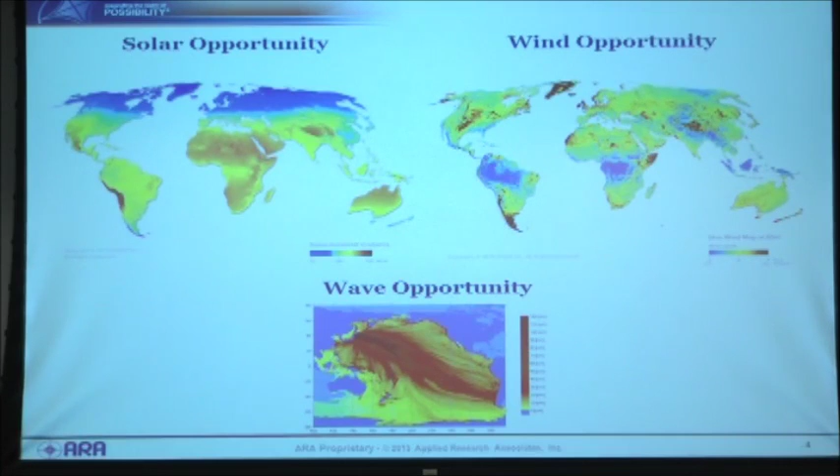If we compare Germany and the USA, in population the United States is almost 4 times Germany, and in land area almost 28 times. Germany is almost as big as Montana, actually smaller than Montana. In GDP, the United States is almost 5 times the German GDP.

If we look at the solar energy incident on the United States, it ranges between 1,200 and 2,500 kilowatt-hours per meter squared per year. In Germany, it's between 1,000 and 1,400. Now, if Germany has the guts to declare the Energy Plus plan as the national goal of the country, then I think we need to have the guts to declare at least the net zero plan as our national goal in this country.

In ARA, in our Smart Energy Group — SMART stands for the usual renewable and sustainable technologies — we work on developing a few efficient technologies, both energy consumer and energy production technologies. I'm going to give just a few of them for the sake of time.

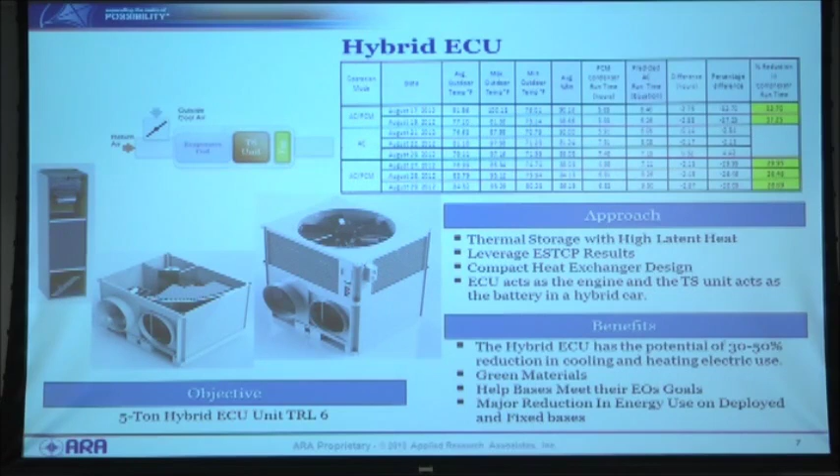Thermal storage in buildings, this is to increase the building walls' thermal inertia. It's like old days when the ancient Egyptians built their homes and worship buildings with thick walls to maintain the temperature steady inside the building. So we can do that with phase change material if we integrate that in the building walls.

There are two products available. They are not commercial yet, but you can buy them from the companies. One is the ThermalCORE, which is a sheetrock impregnated with a microencapsulated PCM. The other product is the ThermaMATS, which is installed behind the sheetrock. It's a mat with pouches filled with the PCM.

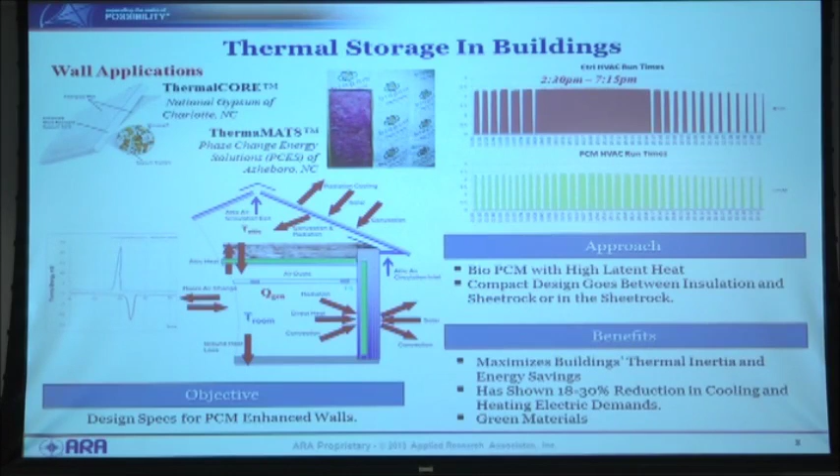We tested the same material on what we call the doghouse test. We have two small buildings that look like a doghouse. One of them is again equipped with the PCM and the other without. The PCM unit was on the walls, as you can see in the picture, and under the roof of that doghouse. And you can see on the graph the daily readings.

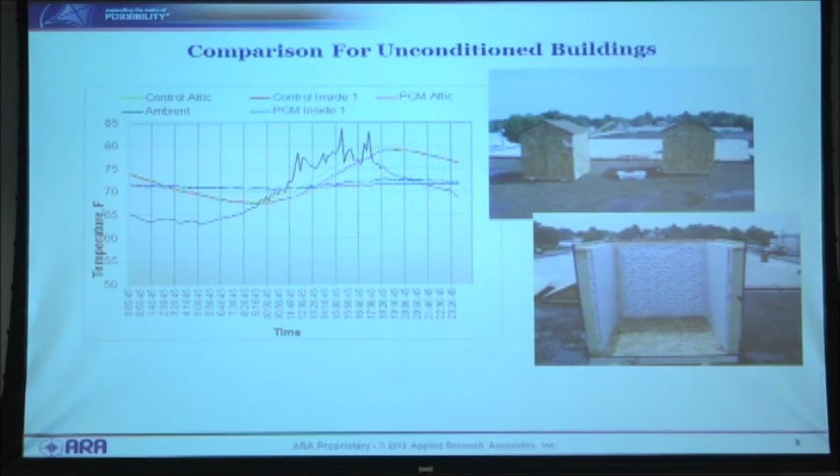That day was apparently a little cloudy, and the outside temperature reached almost 85 degrees. The unit without the PCM, the attic temperature and the interior temperature just followed the same behavior, while the one with the PCM stayed almost steady over the 24 hour period. It ranges between 71.5 and 73 degrees inside that doghouse.

Of course, the PCM product potentials are huge. You can see them used in pizza boxes—when you have delivery of pizza, that box has PCM in it, so it can keep the temperature at the right level to reach you hot. It can be applied or used in tiles and floor covers, in furniture, and the wall, as I mentioned, in paint, and in mechanical applications like heat exchangers.

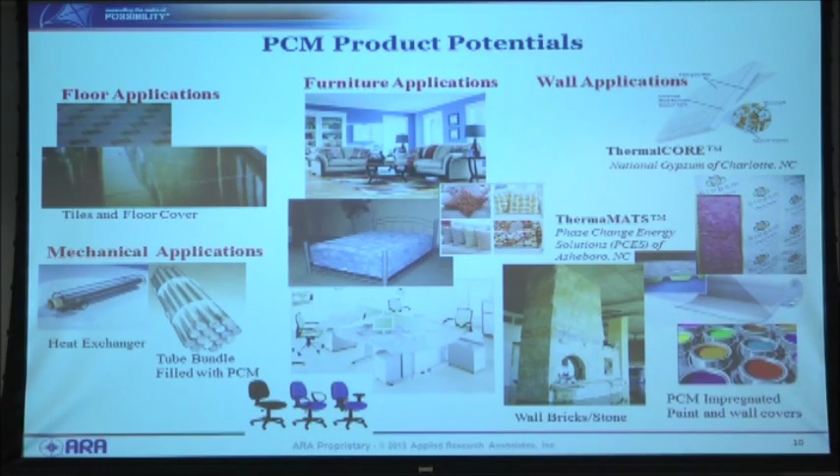We have another project which is a multi-fuel electric generator. We developed a fuel processor that can take any kind of gaseous or liquid fuel and convert it to hydrogen-rich syngas, and then the syngas can be fed into a fuel cell to power it and produce clean energy.

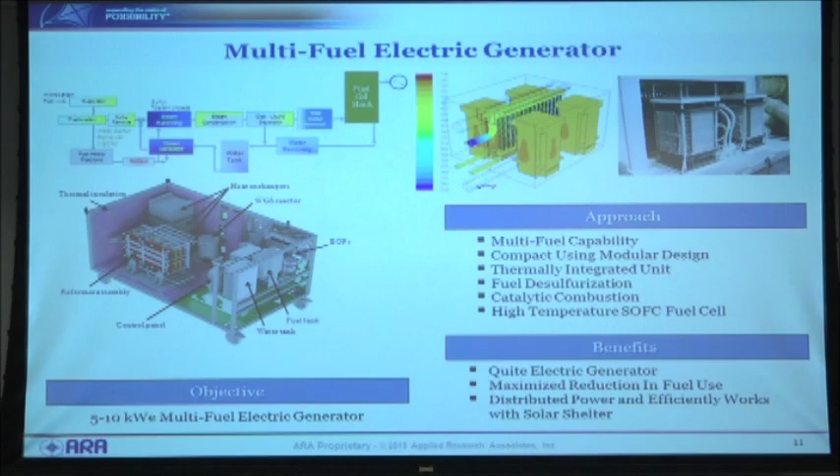One of the projects we finished very successfully—I hope you guys saw that on TV yesterday in the news about AFCEC—we displayed the efficient shelter technology. We were able to take a shelter, and you know, in deployed bases, each shelter has a 5-ton air conditioning unit, and this 5-ton unit runs 24/7 just to meet the cooling demands on the shelter.

So we took the shelter, we put a fly on it, and on the fly we put photovoltaics, a thin-film photovoltaic system, and we used a better liner in the shelter and a better door on it. We were able to cool and heat 2 shelters with 1 heat pump. That's a huge reduction in fuel consumption on deployed base.

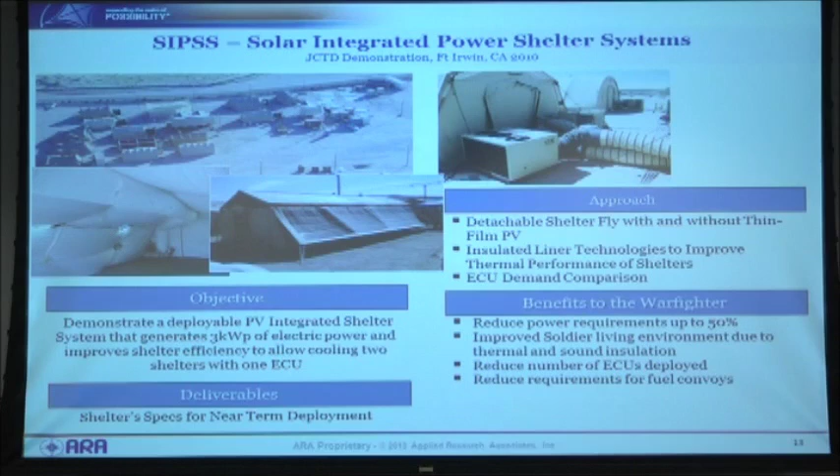If we calculate the reduction with the photovoltaics generation, we reduce the fuel consumption by 46, almost 47%. And if you know that 70% of the power generated on the base is consumed in air conditioning, this translates to a 33% reduction in fuel use on the base.

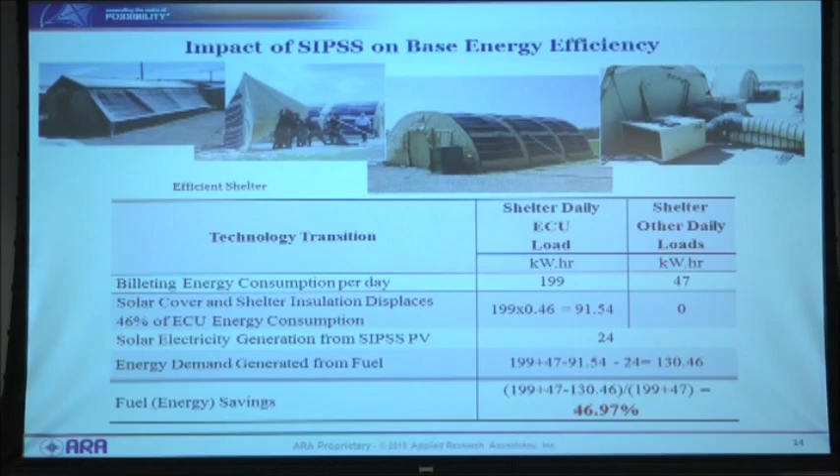Our next step is to model the shelter thermally and really design each layer to give maximum thermal resistance to the heating and cooling load.

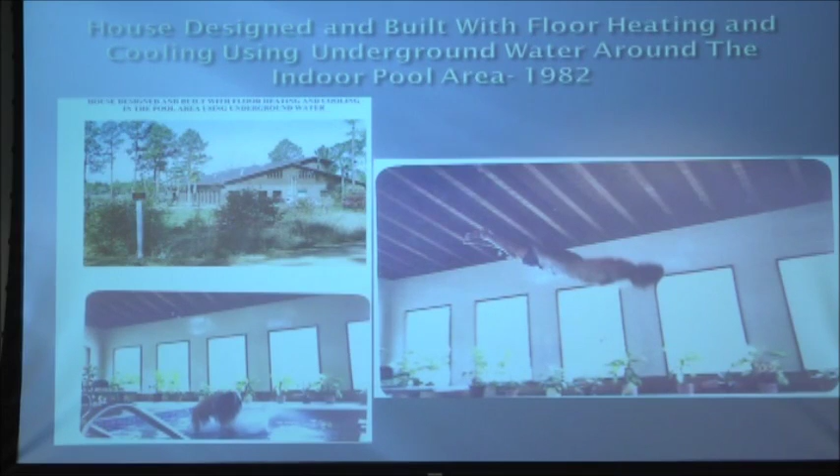This is the house I built, I designed actually, and this is me also jumping inside the house. This is an indoor swimming pool in the house, 60 feet, approximately 7,000 square feet added to the existing house. This house exists in West Bay. If you drive 388 west, south, Pearl Creek, this is the only big house you can see. I don't know who's the owner, and I don't think the owner knows what he has here.

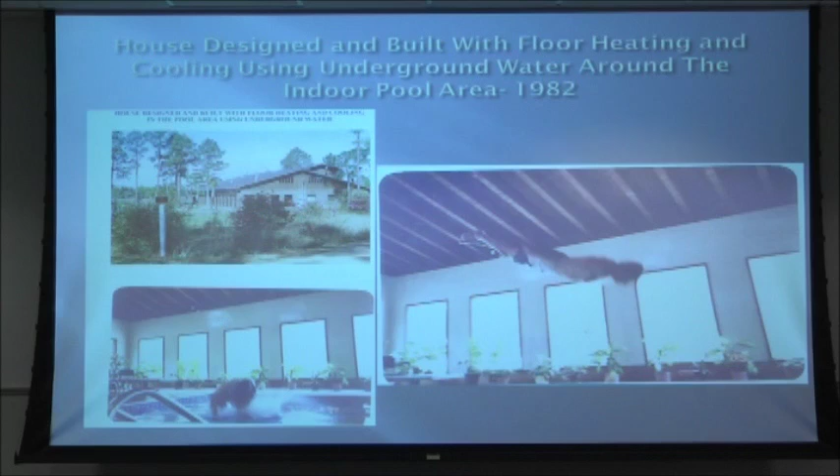Next slide, this shows you the roof is facing south, that it was prepared to put solar collector, passive solar gain. All these windows are for passive solar gain. The next slide, I'll show you.

This, of course, at that time there was no AutoCAD. If you look at all this piping around the swimming pool area, I put insulation above the grade and put copper pipe, 3/4 copper pipe, header, and I planned on putting coaxial pipe, getting underground water at 55 degrees and distributing this in the area of the pool for preheating, pre-cooling only, and avoiding the condensation or the dew point. All of this has to be done.

Of course, I got in trouble doing that. This is state of the art nowadays, using floor heating, floor cooling. At that time, if anyone here was around that long, there was no Lowe's or Home Depot, only the warehouse and the Ace in Glen Burnie.

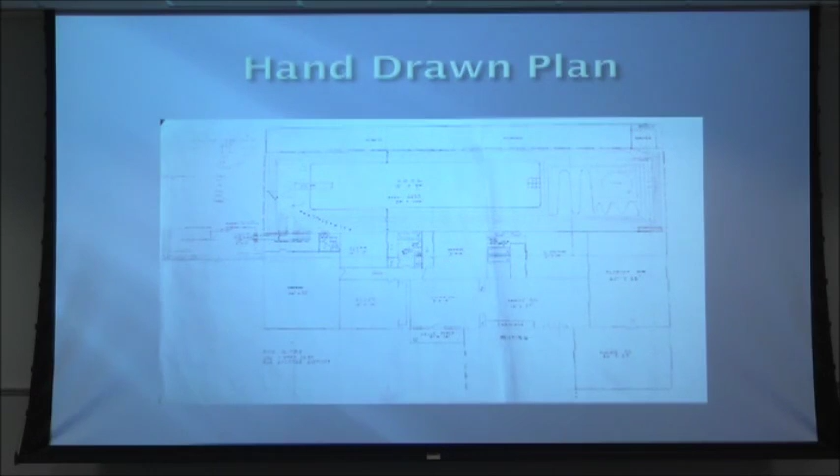Next slide. Now, as you have seen, I have a background in nuclear engineering, background in energy, solar energy, everything to deal with engineering related to energy. And also I took like 15 different courses in mechanical engineering, electrical engineering, you name it.

In my opinion, you can sail against the wind. You can actually pull with the sun, but you cannot go against the wave. With this wave, this is what I mean, that's your wave and my wave. Solar energy was not something you could sell at that time.

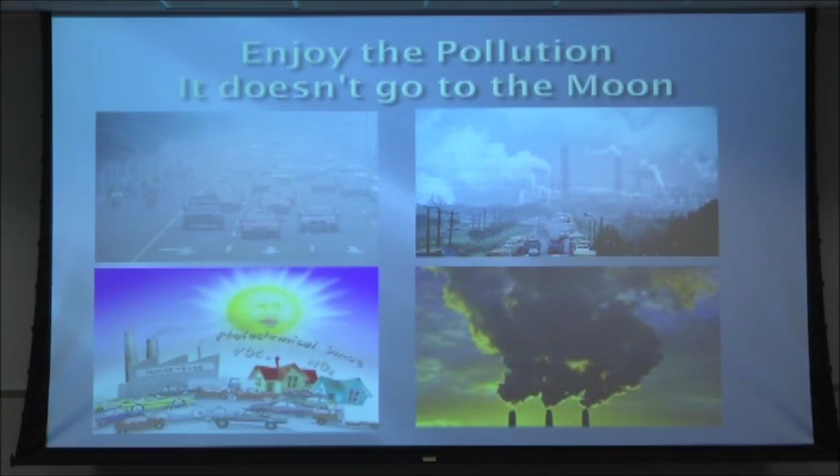I wish a young engineer could calculate this. The universe is limited. You can calculate how many atoms there are and how long this will last. It's a simple calculation in my opinion. But by all means, what you're putting into the air here, is it going to go to the moon? No. It's going to stay here in the atmosphere. We are in a big garage, whether you want it or not, a big garage that we cannot afford to fill up producing this air.

Thank you, Dr. Rafa. And as a non-engineering person, I can tell you I still do not know the difference between power and energy. But as a finance person, I understand about dollars and currency. With 2 kids in college, I do not have enough of it, and what I do have, they take all the time.

One thing here, in the United States, every person uses 12,000 watts per person per year. In Europe, they use 6,000 watts. When you multiply watt, which is power, by time, you get kilowatt hour, which is energy. This is what you pay for electricity. In underdeveloped countries, they use only 200 watts per person, which is basically like 2 light bulbs per person per year. So your contribution to pollution is 200 compared to 12,000.

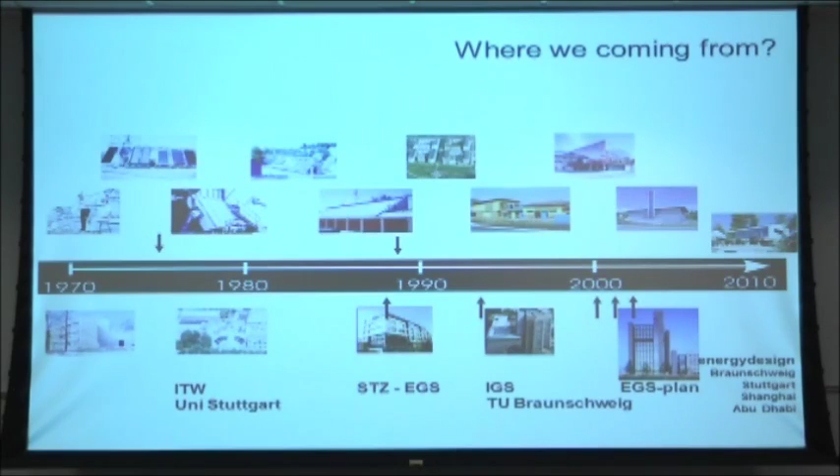And during all this time, 40 years now, we established a lot of companies around me. So at the moment we are nearly 70 to 80 engineers around Germany, Shanghai, and in Abu Dhabi. And at the institute we are 30 scientists.

So the reason I'm here, by the way, is that we created an EGS-plan here in the United States, in Panama City. So together with my very old friend, we would like to introduce solar systems into practice.

And the reason is, I think the time is now there, because we had a revolution, and the revolution was that the Chinese are now producing photovoltaic systems 10 times — not 10%, 10 times — less expensive than it was maybe 5 years ago. When you asked me 5 years ago if photovoltaic had a chance compared to solar thermal for making hot water, I would never say, oh yes, it had a chance. They had no chance, because photovoltaic was so expensive in the past. And then came this revolution in China. The Germans and other countries developed the machines, the production there, and now they re-import, and all the German companies are bankrupt, by the way, at the moment in the solar energy field.

But this was happening for the customer. For the customer, what's happening now? I'll give you the message: at the moment, if you put one piece of photovoltaic on your roof, it's cheaper than the electricity you buy from the grid. Maybe you don't believe me now, but we can go into detail if you'd like to know the real prices, because this is what we have done in the past, in the last, let's say, 10 years in Germany. So let's go very quickly to this.

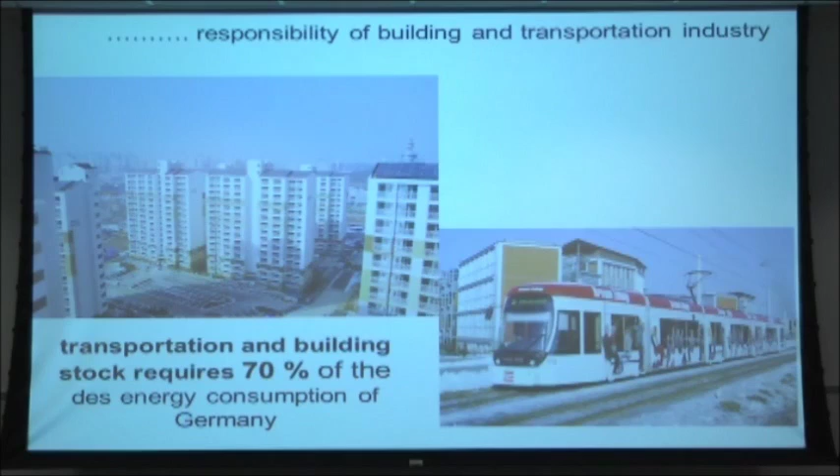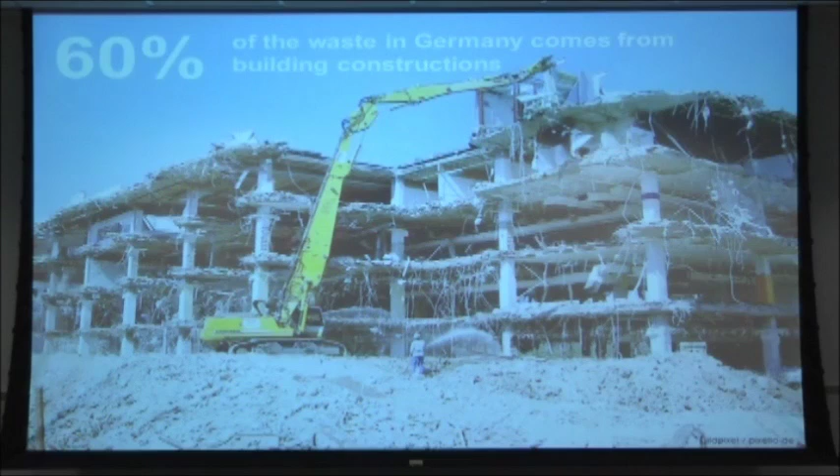So this is our challenge. Another challenge is that 50% of worldwide material consumption is construction, and 60% of waste materials is also linked to construction. Mr. Arafat told us he built nice houses without garbage, without waste, but the reality is 60% of all the waste we're producing comes from building construction. So we have to think about this.

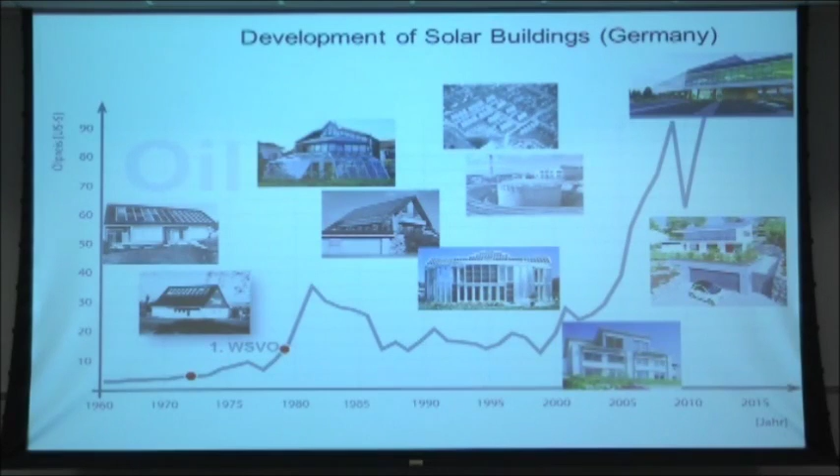We have a grid, we have to feed into the grid, so in recent years we've been thinking more about smart grid technologies - all things are linked, the cars linked with the buildings and so on. So this is what I would like to speak about.

I think I've spoken a lot about this. So this is the National Plan of Germany. What is it? The National Plan was from 2010 - our Chancellor, Frau Merkel, introduced it, called the National Energy Plan.

It was the first energy plan we had, and it was a plan with real values, clear objectives - not just blah blah blah, we could do this, maybe we could do solar, maybe we should have wind, blah blah blah. No, a clear objective was set. I will show you the figures.

I hope I translated this right: Energiewende. If you go by car in one direction and make a U-turn, you go in the other direction. This is the word in German - Energie means energy, Wende means you make a U-turn. So this energy U-turn came in 2011, after the plan.

In this energy U-turn, one thing you may have heard is that Germany switched off all nuclear power plants. We had nearly 20, we switched off 8, and nothing has happened. A little bit more gas generation plants are growing up, but by 2022 we will have all nuclear power plants off.

There's enough time, and from an engineering point of view, I think there will be no problem - this will be solved in the next 6 to 8 years. But what we need, of course, is a cultural change. If we don't take the people with us, we could not reach this Energiewende, this energy turnaround. We need the people, and the people have to follow these political decisions.

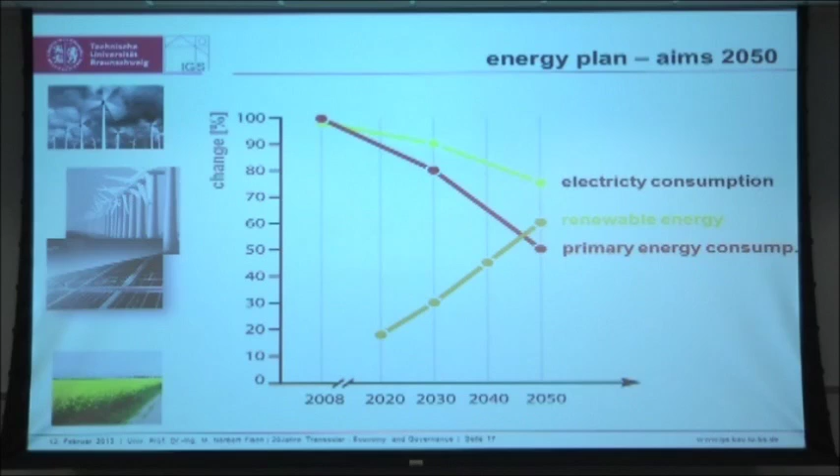But the economy point here, for the economists, GDP - when I was in school, university, I learned that GDP is parallel to energy consumption. This is what we learned. Your gross domestic product is parallel to the energy you use or consume. Maybe this was right before 1990, but from 1990 to the newer days, you see the gross domestic product rising up, but our primary energy consumption is stable. It's not increasing, not decreasing, but our economy is increasing as typically people expect. Is this okay? Question mark for our people.

But now what we've decided in Germany is that we would like to increase the GDP by 26% by 2020, but the primary energy should go down over 20%. I call this - my expression - hyper decoupling between economy and energy consumption. So we will see if this is working, we will see.

So, smart buildings and smart grids - I wrote a book about this in one month. This book will be published in English also. This book describes smart cities, smart buildings. My friend helped me translate it - it was hard work for him the last months to translate this book from German. It's a German book, in English.

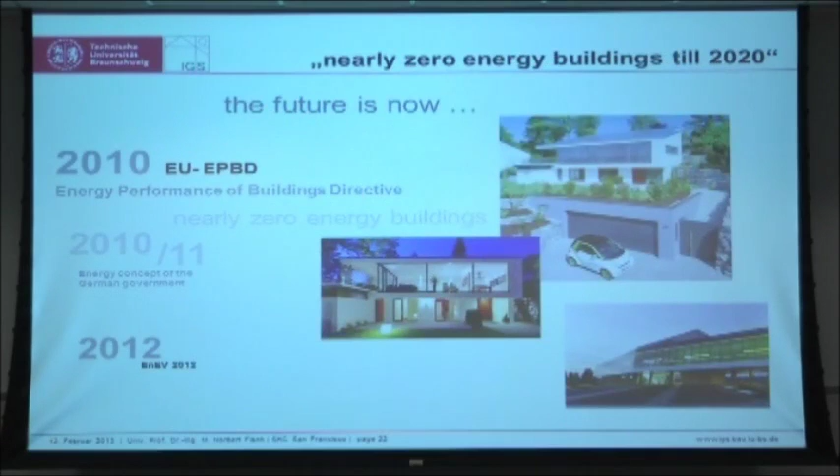You will see that the car, the buildings, and the decentralized system is one unit. So they communicate with each other. When we're speaking about smart grid, what we mean is that we have an intelligent network, and we combine with this intelligent system energy producing and energy consuming. It's a kind of communication system, and this is what we're working on. I would like to show you some of this project.

What means net surplus energy? There are two explanations. One is that over the year, the balance of what the building is producing is higher than what the building needs for everything, by the way - not only for cooling, but your fridge, your washing machine, your dryer is included in the balance, and this is what you consume. It means the way from energy consuming buildings to generating buildings. Another, more advanced explanation is that during the lifetime of a building, the building would export more energy than it required to be built.

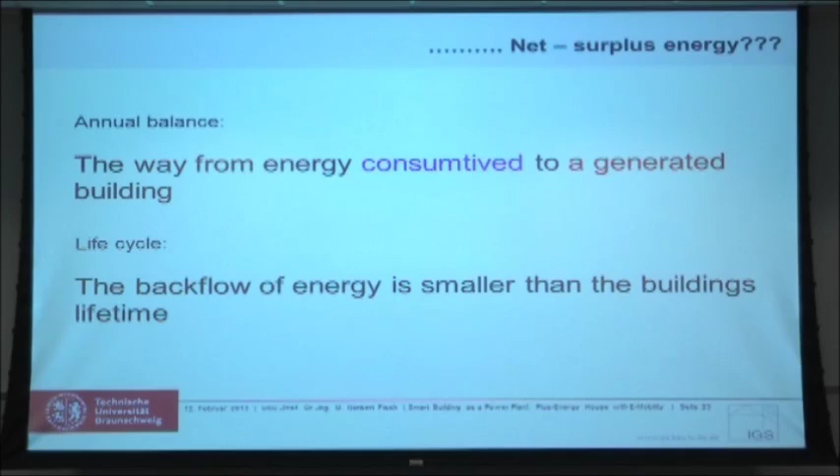Everyone who builds a building needs a lot of energy because you have to buy your glass, your wood, your furniture, you have to buy everything. In our case, we use a lot of concrete - our houses have a lot of concrete. They don't shake when the wind comes, they're very stable. So there is a lot of energy in the concrete and a lot of energy in the glazing, because we work with nearly double or triple glazing. When this happens, this is the graph you see - this is what you might call gray energy or embedded energy, the energy contained in the material that you have to produce.

During time, if this is an export building, a surplus energy building, you have a certain energy payback time, just as we have a money payback time in the economy. When I speak about PV, it's less than 10 years, by the way. The energy payback time of this house - I'll explain more about this house - is nearly 22, 23 years, and this is marvelous. No other building will give something back. This building has only cost a lot of energy but gives nothing back - and of course, that's normal.

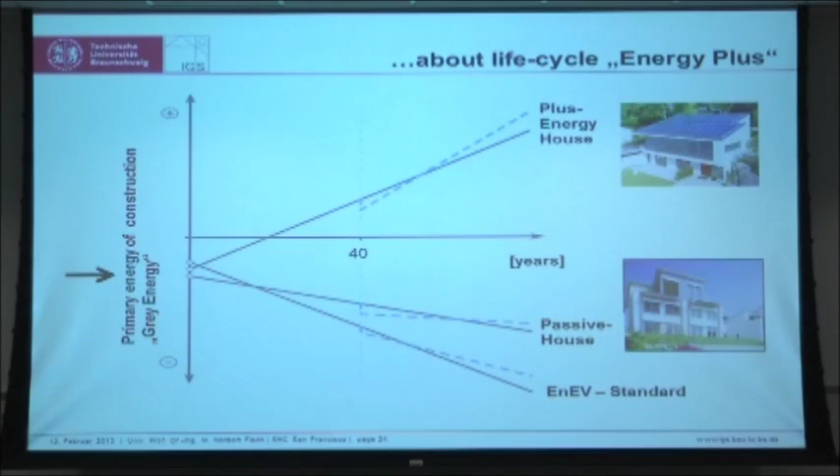But this, let's say, was the revolution of PV - producing electricity from solar. From an engineering point of view, I can tell you, you can sleep well - you have no problem with steam, no corrosion, no explosion, because sometimes with water systems the store gets too hot and corrodes, but with PV the pump isn't running by electricity in that way, nothing happens. Today, the electricity - what was today? It was totally cloudy, shit weather, it was raining. When you come to Mr. Arafat's house, still with rain we have electricity output from the PV. You could not believe it, but we have so much energy that you can totally light your house, even by this weather today when it was raining.

This is typically PV, and this is the reason it has come down so much in cost economically. Solar thermal in the last 20 years has only seen a factor of 2 reduction in cost. Photovoltaic has come down a factor of 8, nowadays a factor of 10, because the price keeps dropping - every month we get new prices from the modules themselves.

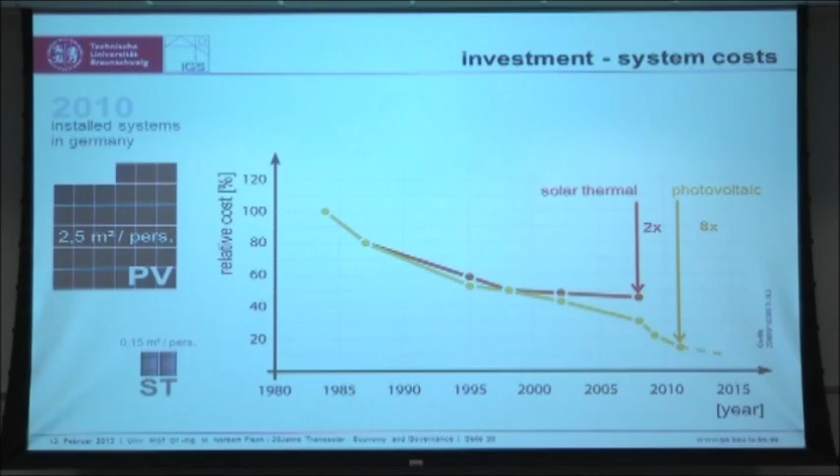I would like to show you, because I delayed a little bit, some commercial buildings we have built using this concept. When we're doing a concept, by the way, Mr. Arafat told you that first you have to look at the location, and also when we build commercial buildings we look at the location - what is happening there? Is there groundwater? Is there wind? How does the sun come through the building? We call this an energy concept process based on location.

This is, by the way, the European Central Bank - what we are actually now building, this European Center in Frankfurt. Before we started with the building, we looked - there's the Main River, the River Main in Frankfurt. So we said, okay, why not use the Main River for cooling a little bit?

For this building, we're also looking at some acoustic problems because there is a railway line or something close by. So the location is very important.

Much of what I learned in my life as a practical engineer: during construction you can make a nice design, you make a lot of simulation. I know that scientists like to simulate everything. Everything simulation, simulation, simulation.

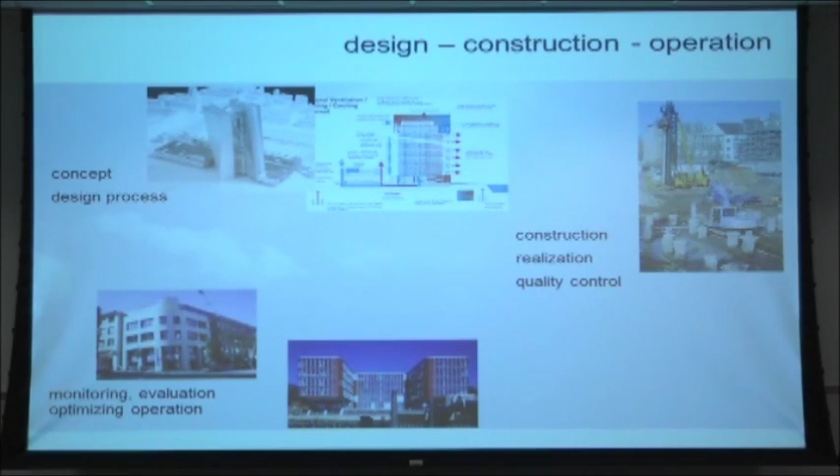Maybe, as you said, you would like a very efficient and very low-cost building. Believe me, this is the same in every country. That means we need one year to adjust the building, because it's not like a car - millions of cars are built according to the same procedure, but every building we build is a new design, and every building has different problems and different engineers and so on.

So this is what I would like to emphasize. I'm not talking about small houses like residential buildings - this is not so challenging. But I think houses like this one here, universities and so on, are really a challenge.

See, when I stand here, I hear the noise - you hear the noise? The area. And when I do a contract with the builder, or with the owner, they give me a task: what should be the maximum noise level on my desk? And then they measure it. And if this noise is too much - you hear that?

And also what I miss in this room - you know what I miss in this room? Sunlight. Windows. Absolutely - windows, sunlight, natural light.

When I give lessons, I'm glad you're not asleep yet, but most people fall asleep when there is no contact to the outside. You need an outside view. I find in so many conferences where we go to Holiday Inns, we're sitting in the cellar - the conference rooms are all in cellars. My goodness, I hate these rooms because you get bored. So I need a view, I need windows, I need to see if it's snowing outside, if it's windy or whatever.

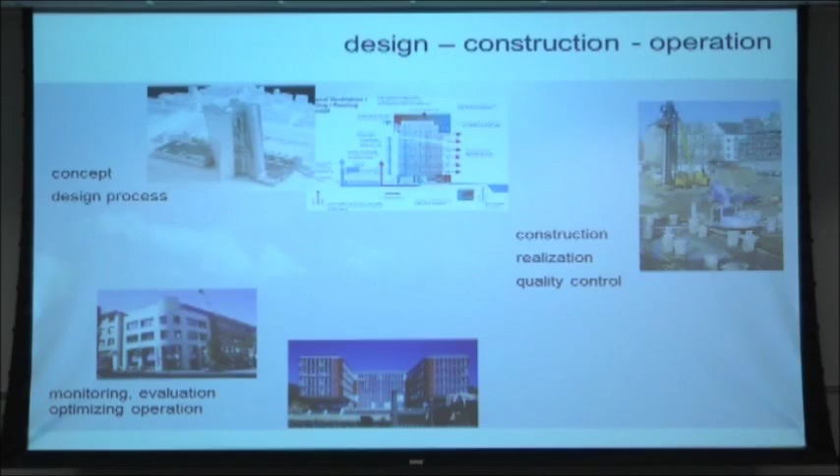This was some of what I wanted to say, but it's just as important as kilowatt hours - how do people feel? I would like to go ahead now and show you.

This is some of the buildings I designed and built. This is for a company producing photovoltaics and photovoltaic modules, so we designed it with that in mind. You see the photovoltaic panels - you don't see them directly here on the rim going around, you almost don't notice it. This is also important, that we make the design work well. We are not... sometimes I see roofs where the collectors just look bad. Have you seen that? It gives me pain in my eyes, because it looks like it's not really creative.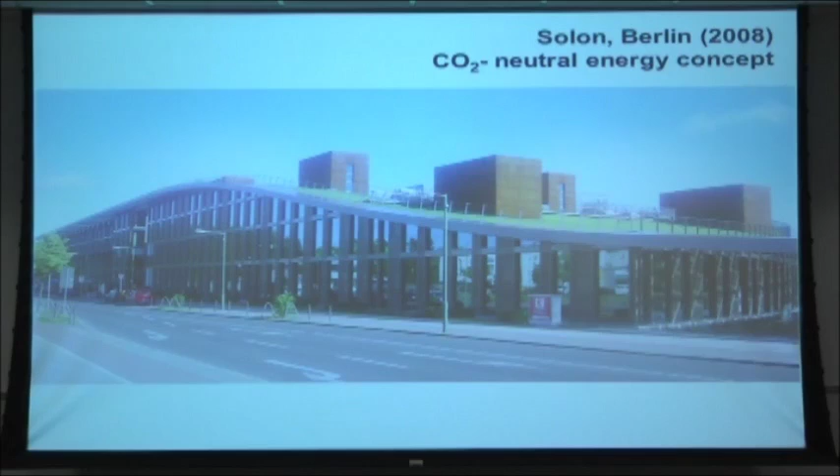The collectors have to be part of the envelope, not only bolted on. Here in your house, I see that your absorbers on the roof look like they're not integrated—it's only on the edge of the roof. So architecture has to take on the task of integrating that. You see this house has a kind of dynamic, a kind of power.

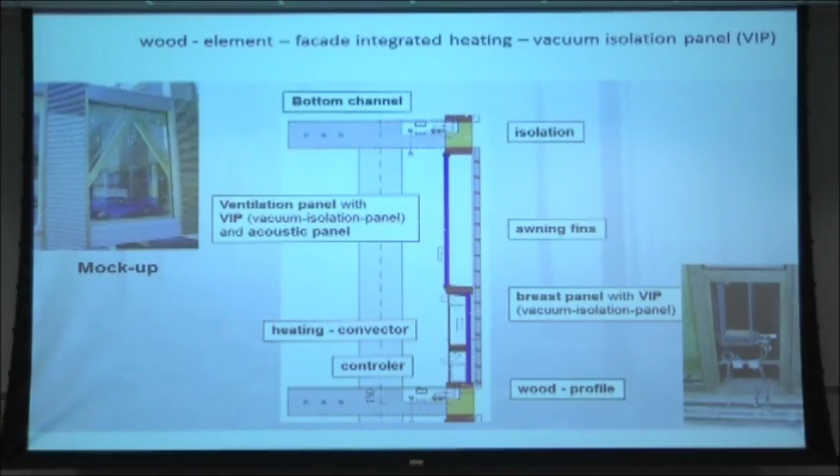It's not only rectangular. There's a lot of information about engineering things, but I wouldn't like to go too deep because I see the audience is maybe not so familiar with PCMs and things like that. So what we're doing in such a building is we start with the envelope.

This is the envelope, and very important is the glazing, of course. Nowadays we have glazing that is, let's say, schizophrenic—you keep the energy out and let daylight in. This is normally, from a physical point of view, schizophrenic. But they develop coatings that let 60%, 70% of the daylight in while only 30% of the energy comes through. These are the sun glazing things—dark buildings, blue, black, bronze. This is crazy because otherwise you need artificial light again.

When you have these dark buildings, you need more light. But what is theoretically right is you have large windows like this one, where the glazing reduces the energy coming in, but the daylight is still transported through. This is a question of how to coat the so-called clear sun protection pane, and then of course shading devices and so on.

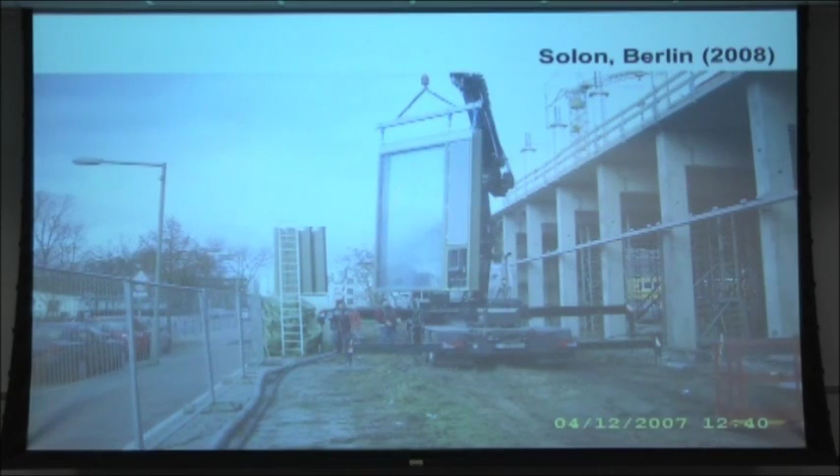We also insert the heating device into the facade. The prefabrication of the facade was, by the way, in wood—a very solid construction. The envelope was wood, and this gives very good insulation with a triple glazing facade.

Another building is this—an academy, from SMA. It's a company that produces inverters for solar energy; the energy from the modules is DC, direct current, and you need to convert it to AC. This company makes 40% of the inverters in the world. They built a building for the academy, for the company's training center.

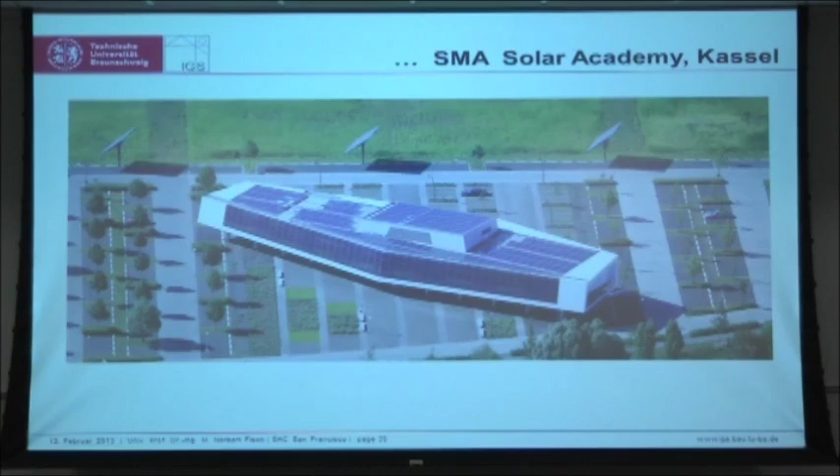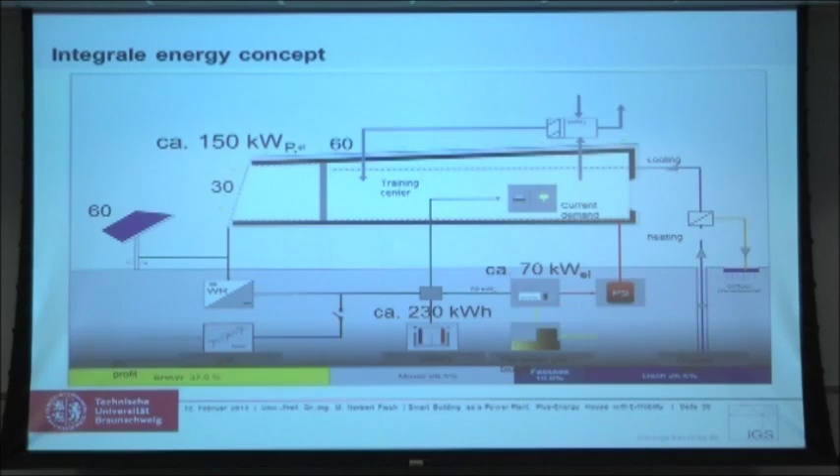You see, the owner wanted us to do the whole envelope as an integration—integration in the envelope, so the envelope itself is the energy membrane. There's a lot of battery technology like lead batteries and cogeneration, but for us this is basics. What's interesting is that from the architecture point of view and the energy point of view, it's not just a battery—it's things working together.

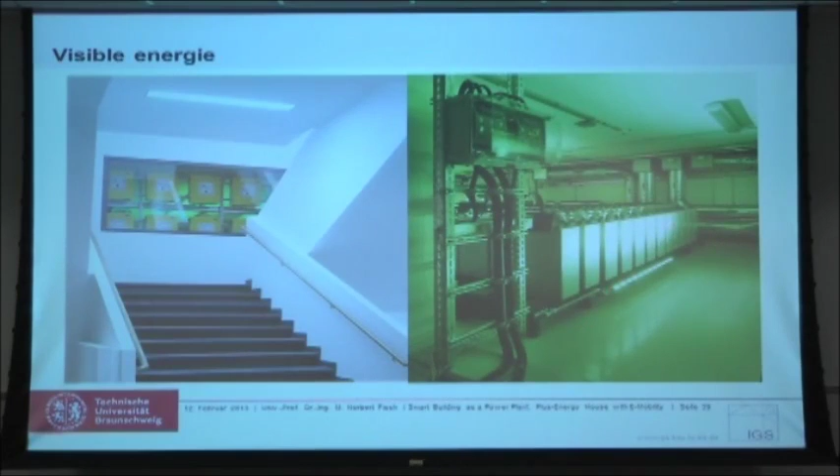So this is the facade. The facade also gives you tension, gives you feeling, gives you atmosphere. We insert things into the facade—this, by the way, is a 200 kilowatt battery for the night.

When the sun is shining, it doesn't have more power than in your city—but when it shines, it shines. It's just not shining as often. But 35 degrees outside with full sun on this facade is also a challenge, of course.

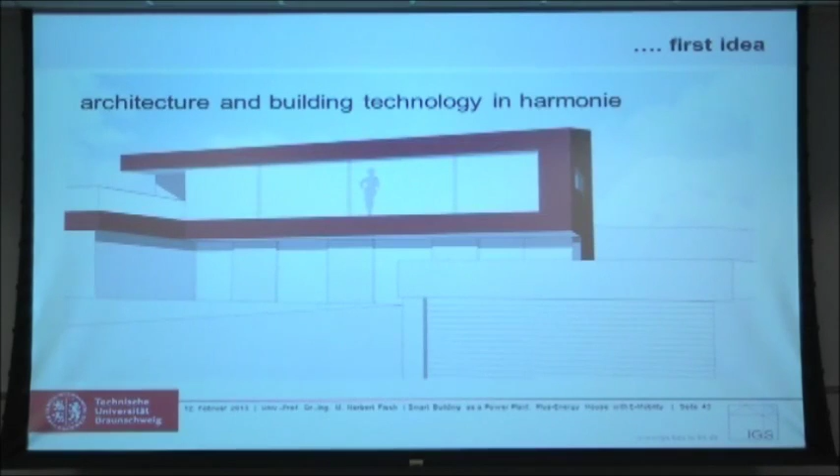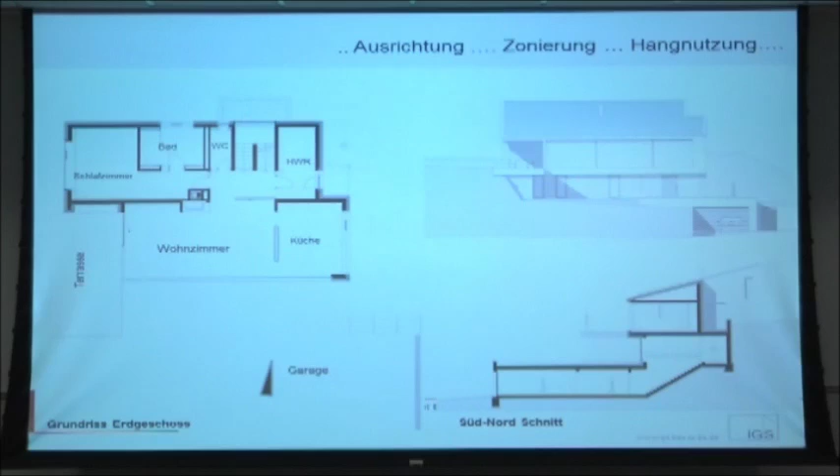My idea was an architecture like Bauhaus. I'm a fan of the Bauhaus style, very simple. You see the kitchen and all the things are close to south, and to the north are the bedroom and the other serving rooms. The house follows the hill, this is a small hill, and you enter the house by the garage and go up, and then you'll be here in the children's area. The children are on the lower level, they can go into the garden, and the parents are here in the upper part of the building.

This is the house from the side. You see it's very solid, concrete, and outside we have 15 centimeters of insulation and plaster. It's very important that this house is solid because it's so stable. What this young guy tried to do with PCM was increase the storage capacity of the building. This happens when you build your house with concrete slabs, then you have mass inside, and this house is so stable in summer. Very nice temperature inside, very stable.

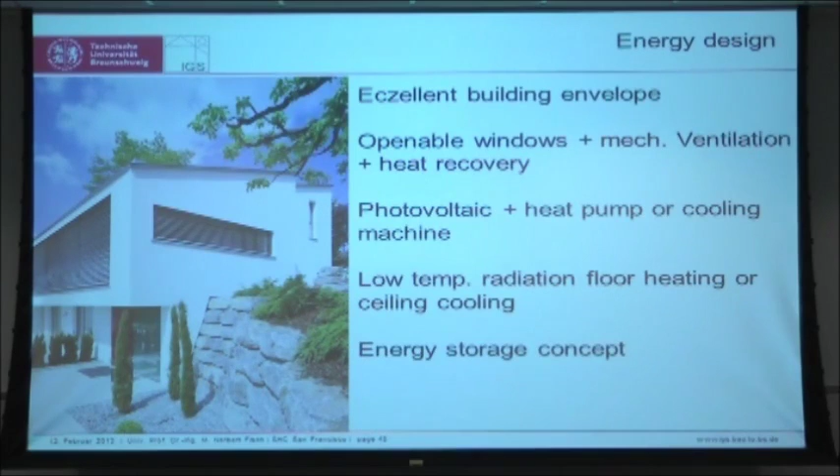There's a lot of things I would not like to bore you with, heat pumps and photovoltaic and energy storage. There's a battery system inside, but you will see something.

What's the beam? The 2 point, it's in meters, sorry, it's 2.8, 2.87, 2.86, something like that.

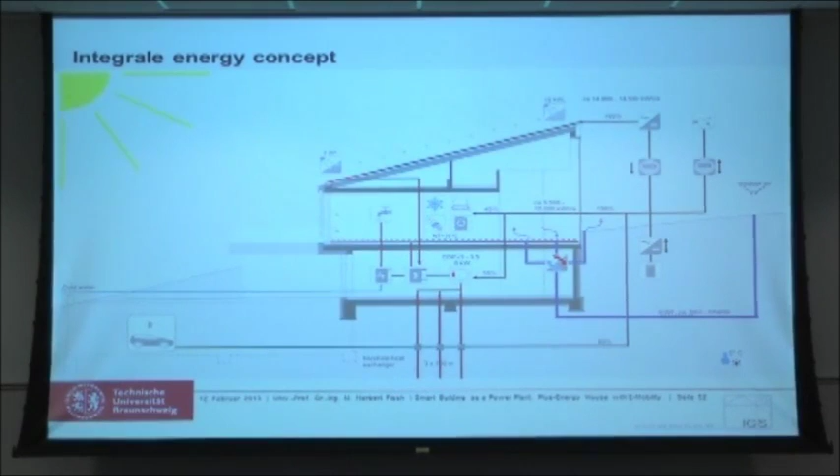When it's washing, I told my wife you should wash during the day. You can cook when you like, of course, but you should, as much as possible, use your appliances during the day, and then you keep as much electricity as possible in your house, because electricity in the house comes from my roof and it's cheaper than buying it from the grid. It's only a question of... I mean, you don't have to do it, but you can do it. You should not change your life, but please, you can ask me.

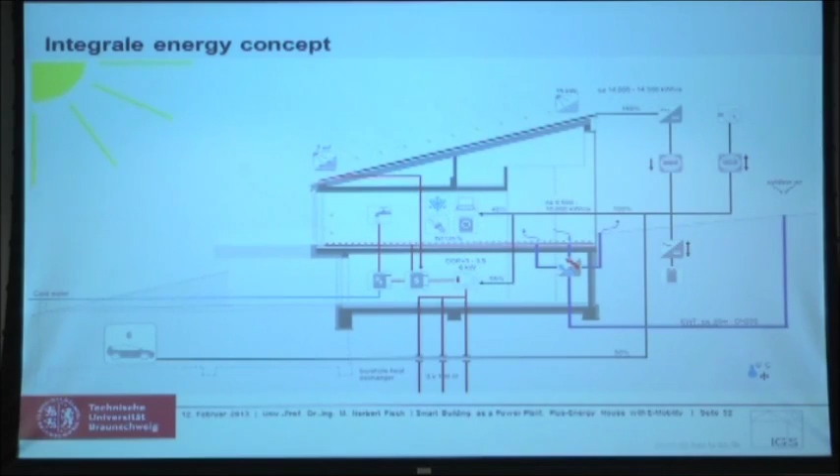Let me go very quick to the other pictures, because I have schools and all these things. I have too much to tell you. Maybe I have more lessons here.

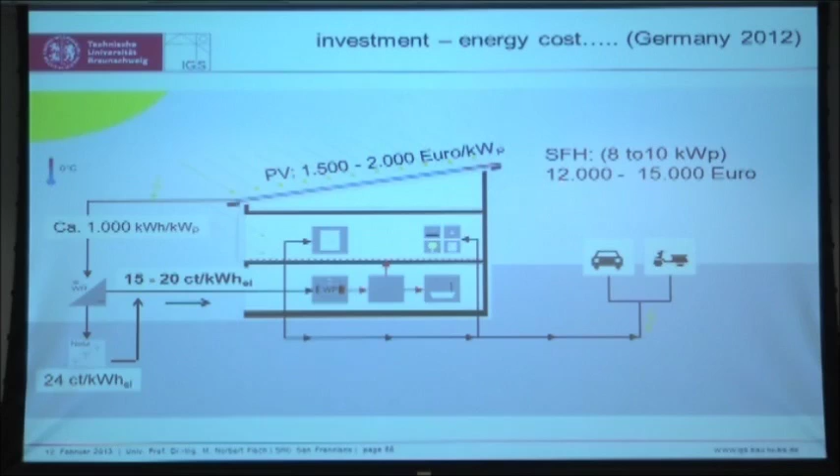Here, this is interesting. I make a short comparison between Germany and here in San Francisco. So this is investment cost, whatever this means, I think you cannot really use this, these are benchmarks per kilowatt peak. But say for a single family house here in San Francisco, you need 12... now go to the US dollar. Yes, US dollar. So a single family house needs 8 to 10 kilowatt peak. You need 32 up to 35,000 US dollars, and the payback time is 7 years.

Lifetime is 25 years. How do I come to the 7 years? Very simple: you have your investment cost, and then you get a tax credit from the government. This is available, and I'm not including incentives. Incentives are kind of a luck, if you get one or you get none. Forget it, I don't calculate incentives here. But if you get incentives, you have a payback time maybe of 5 or 6 years. But if you have no incentives and only your tax credit, then you have 7 years.

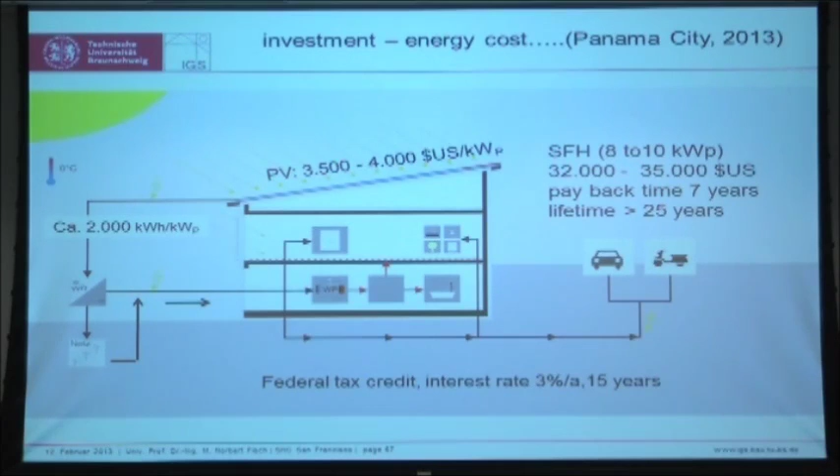Maybe this is now too quick, and if you would like to have more information, contact me. I will explain to you in detail, it's no problem for me, okay?

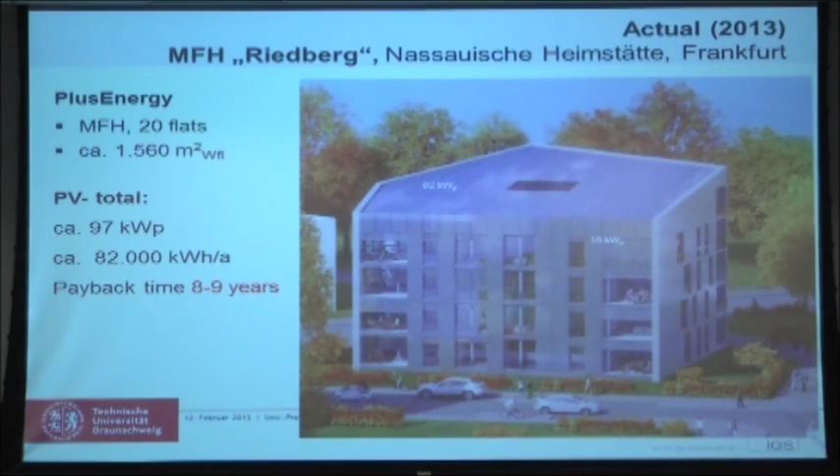In the school, it's not so important that kilowatt hours or energy are reduced. That's my personal opinion. What is important for the school? First, we have to have good students, and first we have good professors. But the other thing is we need good spaces.

We do a lot of investigation in schools about spaces. What is the influence of spaces on student performance? Also in the States, a lot of studies have been done on how the building or the room's performance affects students' performance. There's a lot of information, but not so much being done with it.

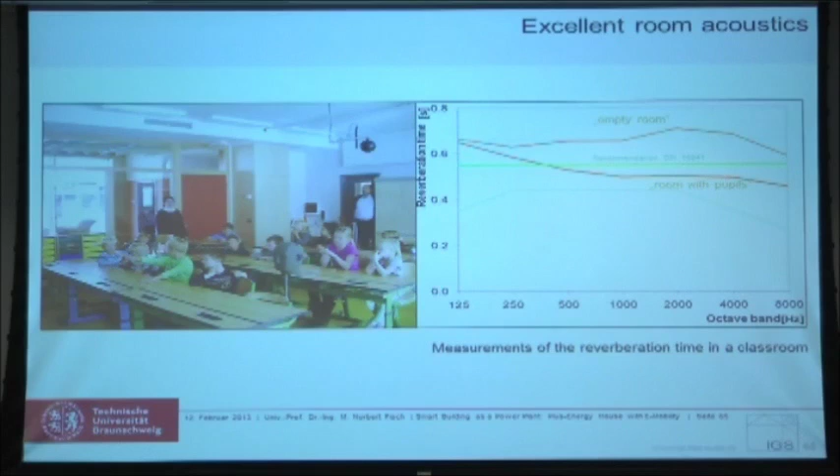You see here, this is acoustics. How does the acoustic influence student performance? Then we made a lot of studies on excellent daylight, but this is now finished, it's okay.

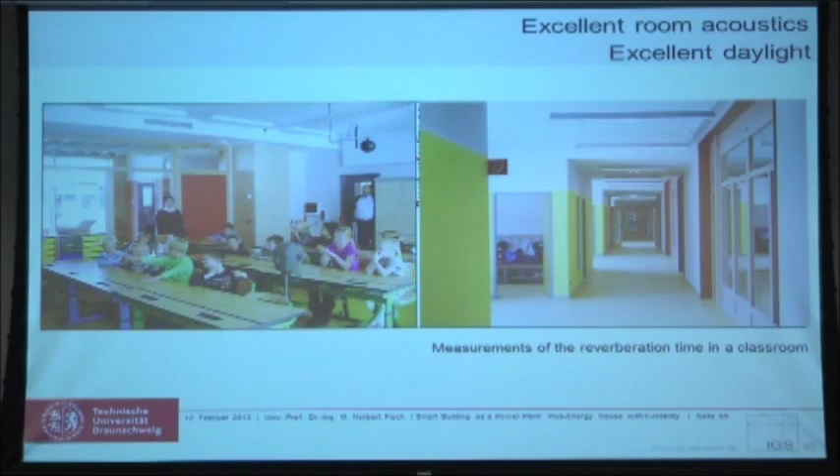I would like to tell you about these schools, because daylight is important for students, and also for human beings. This is a very scientific curve where we measured students' performance in maybe 6 gymnasiums, maybe 500 to 600 students totally, over 3 to 4 years, under different CO2 levels. You know what CO2 level means, carbon dioxide level. You see that if the carbon dioxide level is less, meaning 500 ppm above ambient, we have more than 10% better student performance.

This point is shown by a lot of measurements, a lot of investigations. But believe me, our politicians and all these guys are looking for better insulation and better glazing of the schools, and when we discuss better acoustics, better air, or better light, they say this is not our task. This shows that this is much, much more important to society than energy in schools.